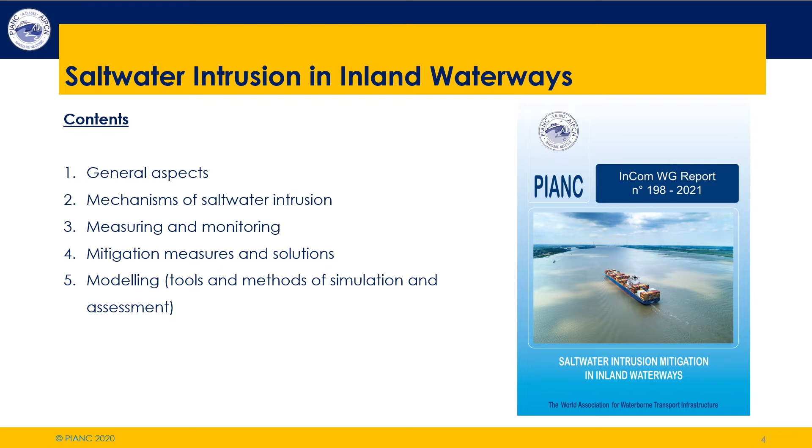A little bit about what this report means in terms of updating the existing literature. There was a PIANC report from the 90s, 40 pages long, a very brief summary of the sorts of issues which have come across. Since the 1990s, there have been a lot of projects, like the expansion of the Panama Canal, the deepening of the Elbe and the new Rotterdam Waterway, and the building of new, larger locks, which have given engineers in the world a lot of new insights into how to study this phenomenon and also how to mitigate it.

So it was a good time for an update, and our update is here on the right - our PIANC report, which is 140 pages long. We thought that was not long enough, but we needed to be as concise as possible. We think it's a good update on what was available before.

Now I'm going to hand over to my colleague Frank to tell you a bit more about the mechanisms of salt intrusion, why it's important, and what affects it. Over to you, Frank. Thank you, Tom. My name is Frank Kösters, and I will carry on from here.

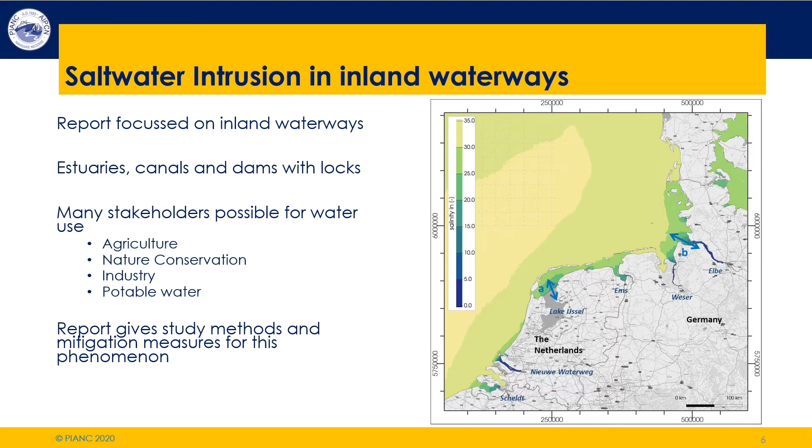For tides for estuaries, or the salt intrusion in estuaries, the salt intrusion itself is depending on the freshwater discharge, which pushes the salt out of the estuary, and the influence of tides. The relative strength of the freshwater discharge and the tides define the different ways salt water intrudes into the estuary.

And then there is a situation in between where we have intermediate tidal energy, and you get partially mixed conditions where you have stratification during only some part of the tides.

However, all of this might change if you take into account effects such as changing sea level due to climate change, or the impact of human interventions, as an example.

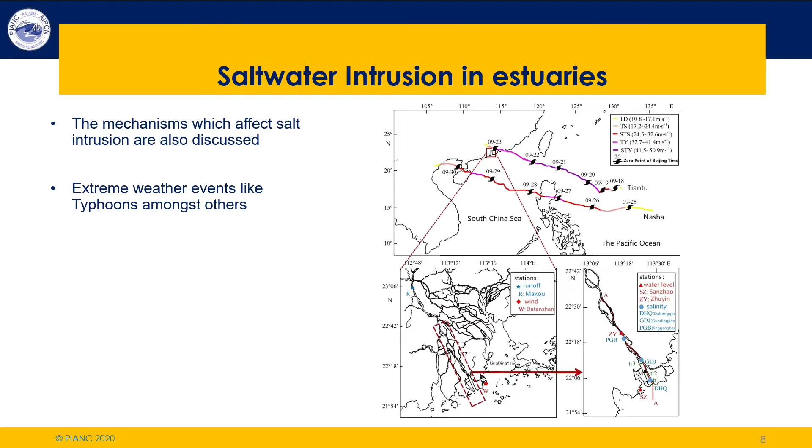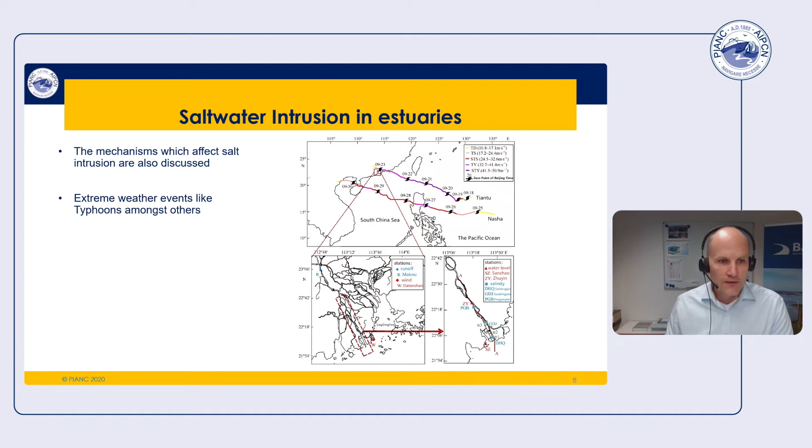As you can see, that's a very complicated mechanism which plays a role, and we go into that within the report. Typhoons are just some examples of extreme weather events which may play a role.

On the other hand, we get salt intrusion through locks, and there are three main mechanisms involved in that.

Firstly, there's the effect due to the boat itself. You get a volumetric displacement, which happens when the boat is leaving the chamber to the sea. It results in a flow from the sea into the lock chamber, and when it enters the adjacent canal, the salt water goes out into the river, carrying salt during that process.

A second mechanism playing a role here is the so-called lock exchange, which is a density-driven current. When salt water flows from the sea underneath the freshwater due to the difference in density, it is mixed into the lock chamber and then goes into the canal as well, with a bigger difference in salinity producing a bigger difference in density and a faster density current.

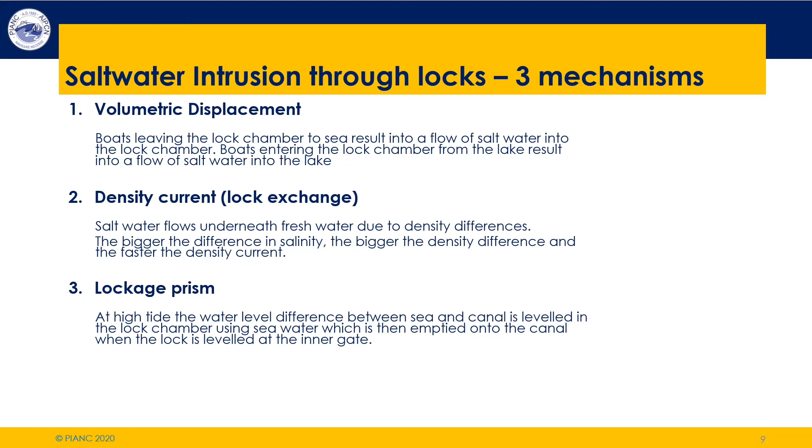And finally, you get something like a lockage prism, where you have different water levels, for example at high tide. The water level difference between sea and canal is leveled, and the lock chamber uses sea water, which is then emptied onto the canal when the lock is leveled at the inner gate.

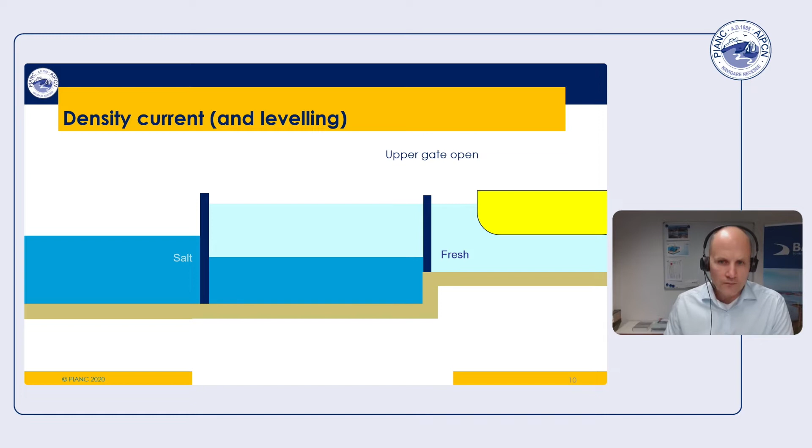In order to visualize these processes a little better, you can see here an animation of a boat coming in from the canal, being in freshwater, and then when the upper gate is open and the boat enters the lock, you see on the bottom the saltwater intrusion due to the density current in the canal.

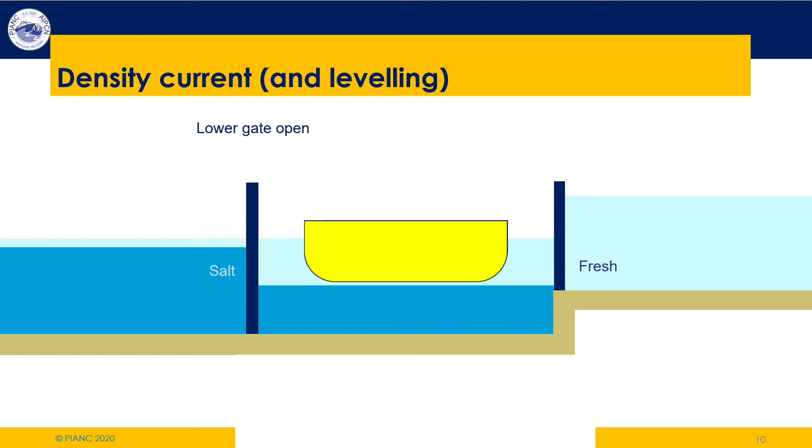And then once the boat is leveled down to leave for the sea, you see the salt coming in from the sea into the lock chamber when the lower gate is opened, and the density current with the salt intrusion entering the lock chamber.

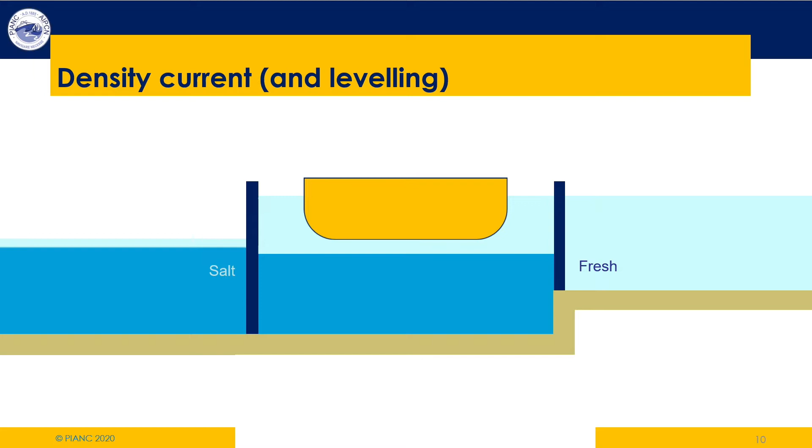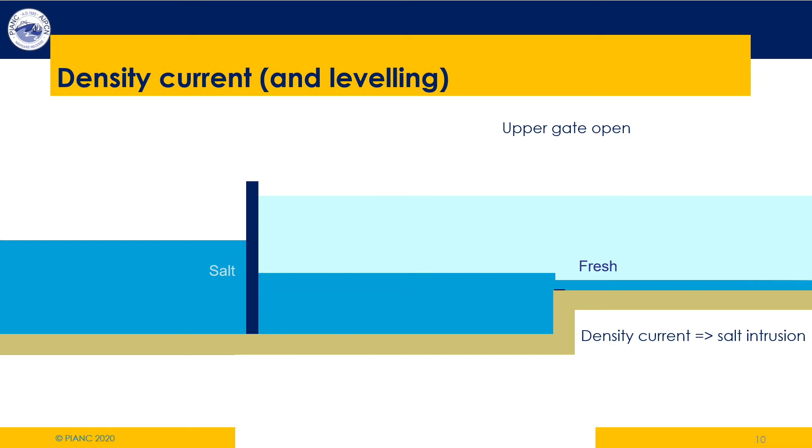And it works the same vice versa. When the boat is coming up from the sea and is leveled up to leave into the canal, you can see the salt intrusion again when the upper gate is opened, and together with the boat, the salt water is leaving into the canal. Well, that is a very brief overview about the mechanisms we can show here.

To dive deeper into it, you have to look into the report. And from here, I'd like to hand over to Tom again.

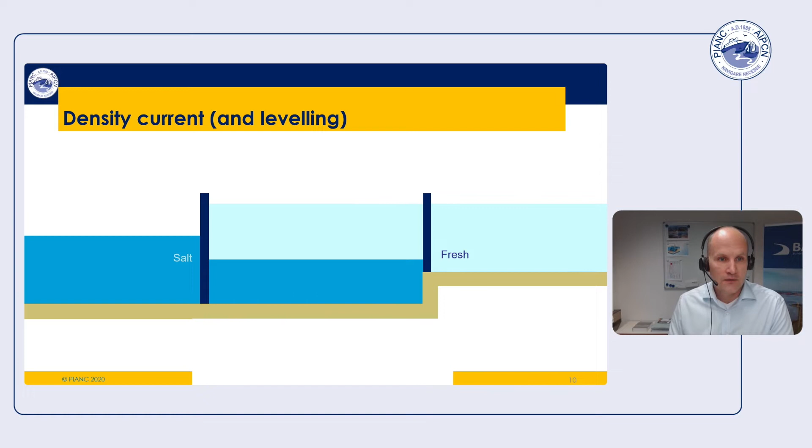So that was our introduction. Salt intrusion in inland waterways is a topic which is often needed to be taken into account in navigation projects, the deepening of a waterway or the building of a new lock, for instance. And these are the things that can have an effect on it.

For the next presentation, we're talking about how do you measure salt intrusion and what sort of measuring campaigns you would need to do to study it for your navigation project. And to present that, Gary Brown from the US will take over. Off you go, Gary.

Thank you, Tom. I'm going to be speaking about measuring and monitoring of salinity and some of the questions you may want to ask yourself when you're trying to develop a means to measure and monitor salinity.

The chapter is laid out basically as a guide to develop the set of questions you would want to ask yourself when you're trying to understand and design a salinity measurement campaign. The reasons for that is because there are a lot of different uses for salinity measurement, everything from modeling to just monitoring or informing decisions.

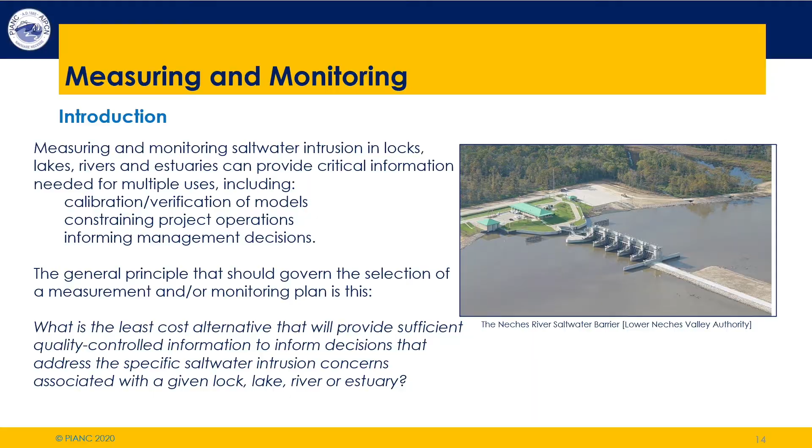But as a general rule, salinity measurement can be an expensive proposition because of mobilization costs and equipment costs. So you want to target the salinity measurement to optimize it for the problem you're looking at. This chapter is written really as a way to bound the problem, to ask yourself all the questions you need to ask in order to properly design a salinity measurement campaign. That's the thinking behind it.

We have a question, it's kind of wordy, but phrased at the bottom of this: what's the least cost alternative that will provide sufficient quality controlled information to inform decisions that address the specific saltwater intrusion concerns associated with a given lock, lake, river, or estuary? It's just a long way of saying the same thing.

How do we optimize what are almost always limited resources to get the data that we need for the problem that we're looking at?

So there are several questions that we first ask ourselves. The first one is, of course, what specifically is the problem that we're interested in? There are lots of different problems. Is it something related to what's the mechanism of the saltwater intrusion?

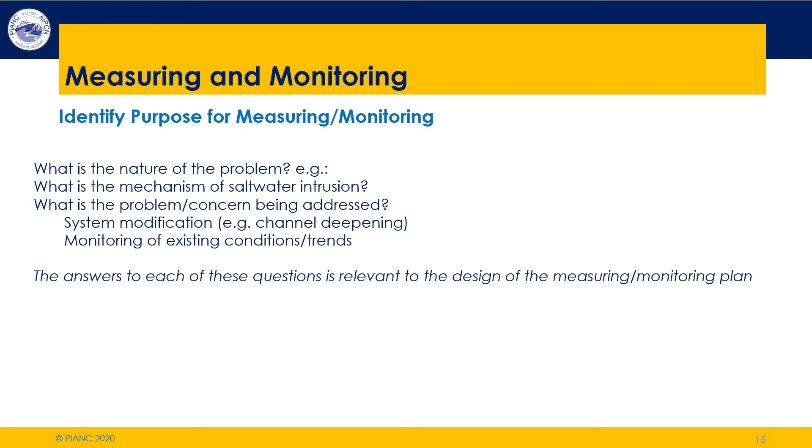Are there one or multiple sources of salinity in the area? Is the problem we're interested in a short-term problem or a chronic problem, or is it acute versus chronic? Is it something more gradual? Is there spatial coverage, or is it a local problem?

All of those, and even referencing the actual mechanism of intrusion, are important, because all of those things will help guide your decision making about what type of data you need in order to understand the problem you're addressing.

Once you establish that, it's important to develop a detailed plan before you execute it, on exactly how you're going to collect the data. You certainly want a robust and realistic budget estimate for yourself.

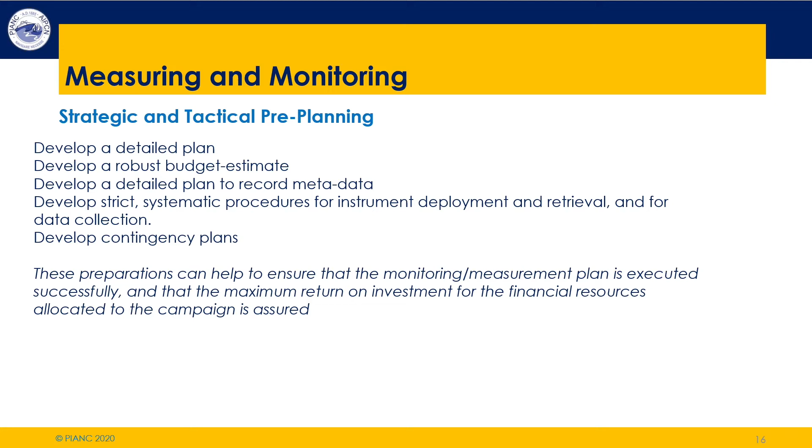You want to make sure you have a plan to collect metadata, so that you record everything about where and when you collect the data. In this sense, it's very similar to data collection in a laboratory, making sure that you've documented everything you have.

Not only for your own project, but also with a recognition that you'd like to be able to archive this data and possibly use it later, since you're investing in it. You want to have all the data available so someone can pull it out and use it, or so it can be published on the web for more general use.

You want to develop systematic, strict, and consistent procedures for data collection, to make sure that if you are deploying multiple instruments, or multiple individuals deploying them, they're all deploying and recording in a fashion that is consistent across the data collection methods, and that the methods are consistent with the design constraints of the equipment you're using.

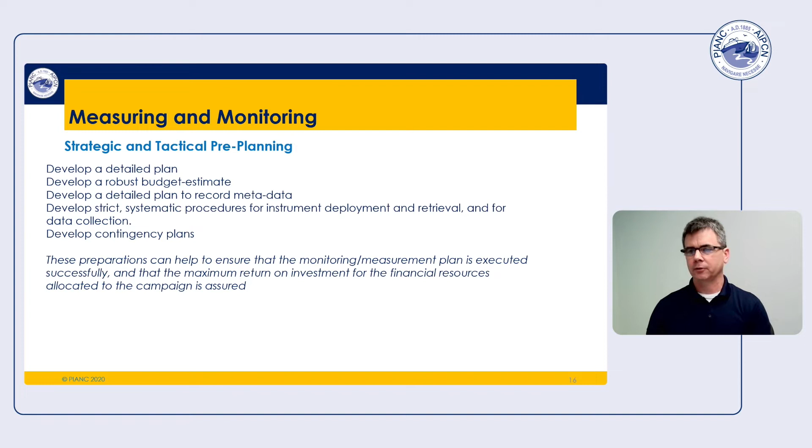You also want to develop contingency plans, because something always goes wrong in data collection. You lose some equipment, equipment is damaged. How do you mitigate for that, so that if you lose a few data collection points, you don't end up without enough data to sufficiently inform your project? All of those things should go into the data collection plan.

We talk about means of measuring salinity. Of course, there are several means to measure salinity. Two of the most common are basically bottle samplers, which get discrete samples of water that are then sampled for salinity, and also in situ conductivity, temperature, and depth sensors that measure those parameters in the water in real time. You can deploy and retrieve them to get much more frequent and continuous observations, and we talk about the advantages and disadvantages of these.

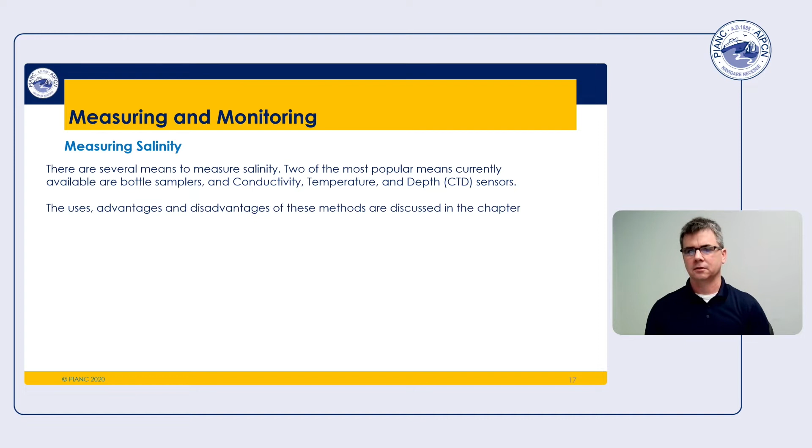There are cost advantages, and maintenance advantages and disadvantages, and which method you select will depend heavily on the type of data necessary for the problem you want to address. As an example, you can get broader and longer term coverage with bottle samplers, but the frequency in time is much less. So if you need higher frequency measurements, you may need to deploy CTDs in order to get those. Those are the types of things you want to address.

And then also you want to look if you're going to have a measurement campaign. Two of the primary types of campaigns that you can deploy are either synoptic station measuring campaigns, where you have stations where you're collecting data continuously, or intensive boat-based campaigns where you're collecting possibly ADCP together with salinity to get sediment fluxes across inlets, or things like that,

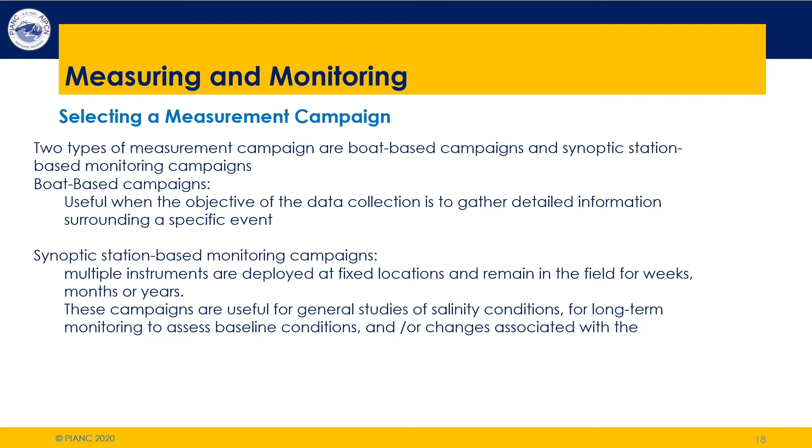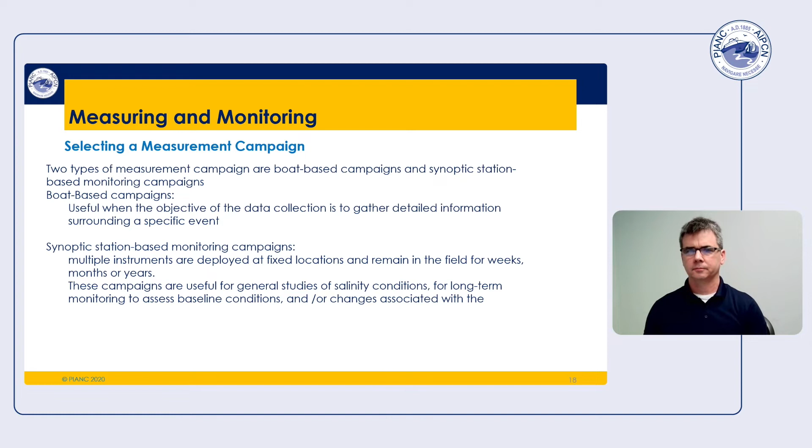where you have much more intensive data collection. And which methods you use, again, are going to be dependent on the project that you're engaged in. The first questions that we ask at the beginning help inform these types of questions. So again, these chapters are a way, hopefully, to help you organize your data collection campaign and get the most out of your funds. And we hope that it's helpful for you in terms of understanding and collecting data for salinity intrusion.

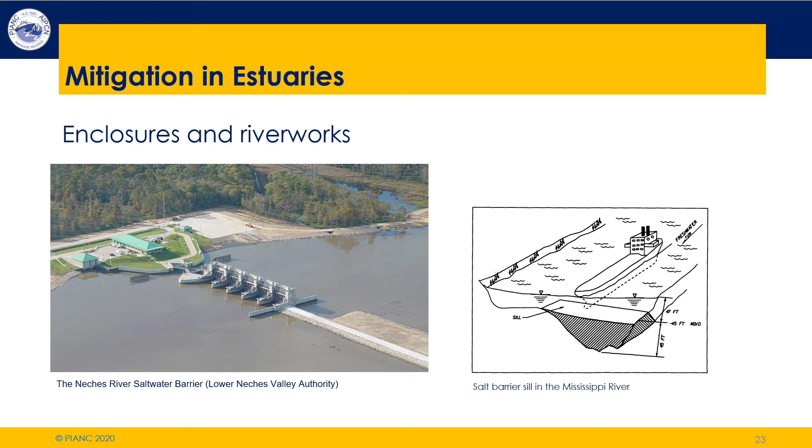But at other times of the year when there's enough river discharge, you can open the gates, or maybe even there's flow over the entire width of the river in those situations. But for the drought periods where it looks like the salt water is coming too far upstream, you can have a structure like this, which closes the gates.

Similarly, on the right, we have an example which will be talked about later by one of the external speakers, Bill McAnally: the salt barrier in the Mississippi. This is a temporary mitigation measure. It's a temporary salt barrier built only in periods of drought, and down in the Mississippi River they have decades of experience in putting this in when it's necessary. There's more information on that in the report.

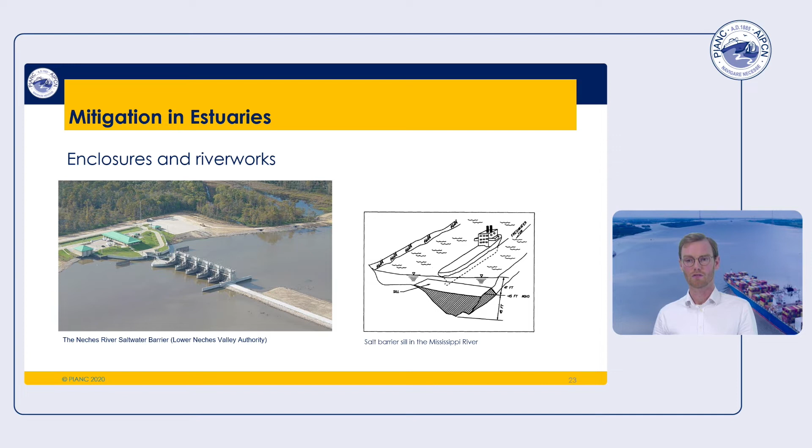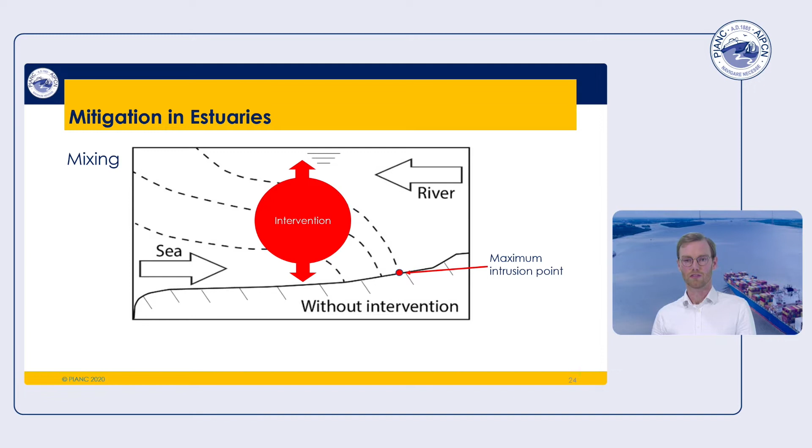Here, this is the situation, and this red point here is your point of maximum intrusion, depending on how you define it. So then, what you'd want to do with this mixing mitigation measure is add some sort of intervention in here to induce mixing in the water column. Now we talk about a couple of intervention types: creating lateral flow, bubble screens or bubble plumes, pumping boats, or strategic dredging. These are described in the report.

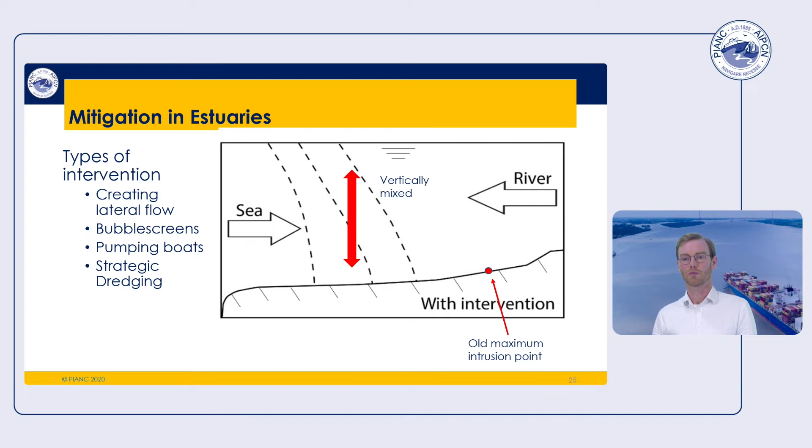The effect that it has on your density profile is shown on the right. You have a much more vertically mixed system, so the lines of constant density are much more vertical, and this has the effect of moving your point of maximum intrusion from the point upstream where it was to be a little bit farther towards the sea. So in this instance, you've reduced the salt intrusion.

Of course, the reason why you want to reduce salt intrusion is because you use the water for something, and where you use it, you extract it from the surface water. This measure may actually be counterproductive because you've increased the salt concentration near the surface in some places. So you always have to be careful about making interferences in your estuary.

And I remember when I was young, my grandfather always used to tell me that I needed to close the door to keep the cold out because he wanted to keep the room warm, and it was only polite to close the door behind you. So that's the same sort of principle here. You've got to close the door behind you to keep the salt out.

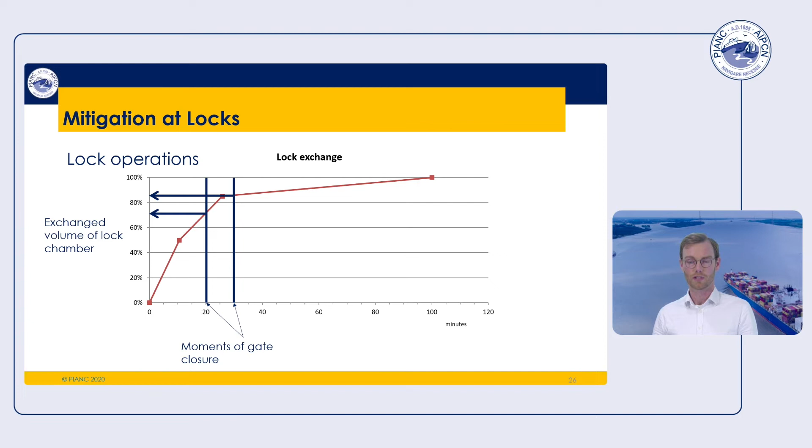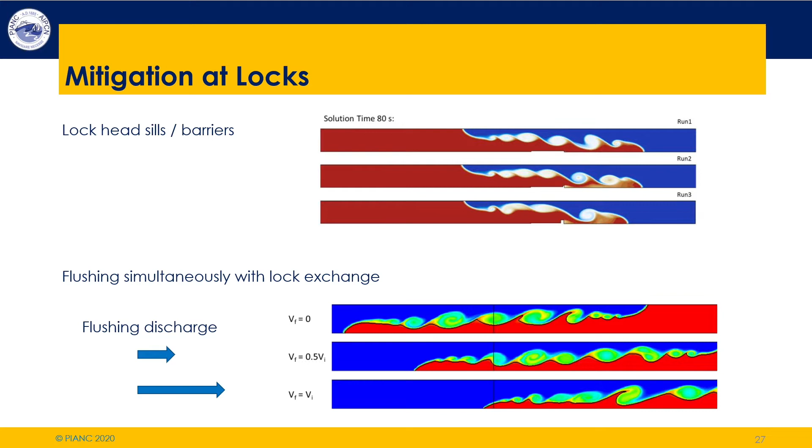So the sill has the effect of not only reducing the height over which exchange happens, but also reducing the speed, because the speed of lock exchange is proportional to the square root of the height. So the smaller the height of the exchange column, the slower the exchange. And underneath, we have examples where you can simultaneously flush the lock chamber with fresh water to stop the salt water from advancing. The lower picture has got 3 different velocities of flushing. So you can see that here the salt water is prevented from moving beyond the lock.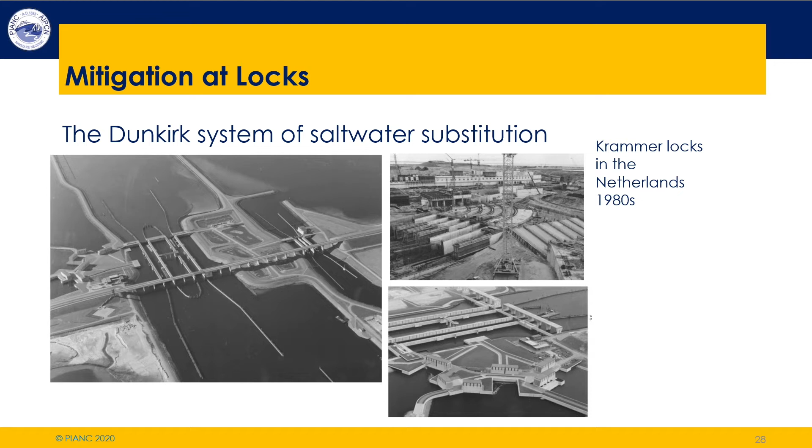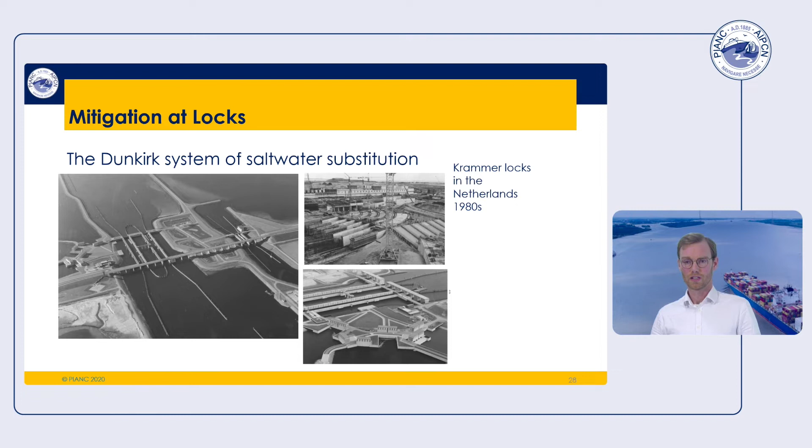And that's got a very, very large cost in building it, and it takes up a lot of room as well, because you have these receiving basins which store fresh and salt water during the process. The process is described in detail in the report. This one is the most effective at reducing salt intrusion to almost nothing, but it costs a lot of money to build, and it also costs a lot of time for ships to pass it, because they have to wait quite a long time in the lock while the salt water is extracted. So these are the sorts of examples we have in the report.

Many more examples as well, and at the end we also have a table to summarize which ones we think are the best ones and in which situations they're the most useful.

Okay, so that's mitigation, and now the final presentation for today and the last chapter is modeling, physical modeling and numerical modeling, and for that I'd like to pass over to Tom van der Wekke. Off you go, Tom. Thank you.

Well, I'd like to present a few slides about modeling. As we have seen in the mitigation contribution, but also in the measuring and monitoring contribution, it is necessary to develop those mitigation measures, and therefore we need some tools to compute whether those mitigation measures will help, yes or no, and how far they will help.

So therefore, modeling is very often used to get a qualitative but also a quantitative impression of the rate in which measurements can be carried out, in what kind of shape the mitigation measures are needed. So that's important, but even more important is that salt intrusion in inland waterways can hamper many freshwater related interests, and governments ask more and more for detailed studies to assess the impact of changes in salt intrusion.

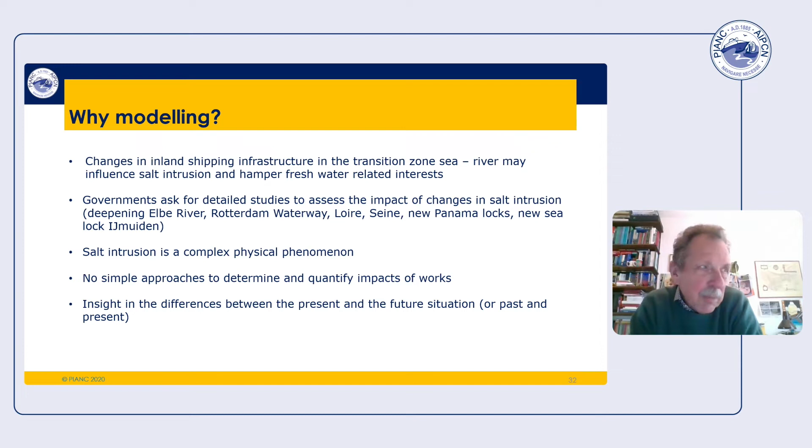Of course, the knowledge of specialists is also important, but they also need models to get more quantitative information. In the pre-computer era, we only had two tools, the physical models, the so-called scale models, or on the other hand, greatly simplified mathematical models. Nowadays, we are happy that besides physical models, we also have a number of numerical models.

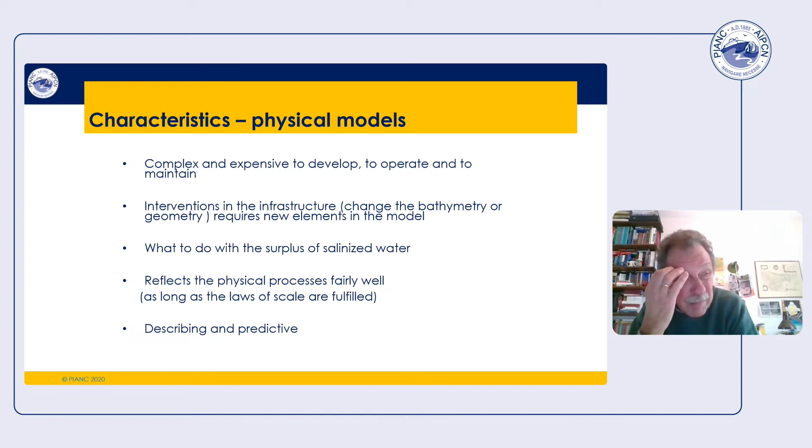So I'd like to tell a bit more in detail about the physical models, the advantages and the disadvantages. Physical models are very complex and expensive to develop, to operate and to maintain. Interventions in the infrastructure, for instance a change of the bathymetry or geometry, require new elements in a model. An important problem also is what to do with the surplus of salinized water.

In a scale model, we have real water. The seaside is salt water, the riverside is fresh water, they meet each other, and what we have in the end is a surplus of salinized water. But where to go with the salinized water? That can be a big problem. On the other hand, physical models reflect very well the processes we like to investigate.

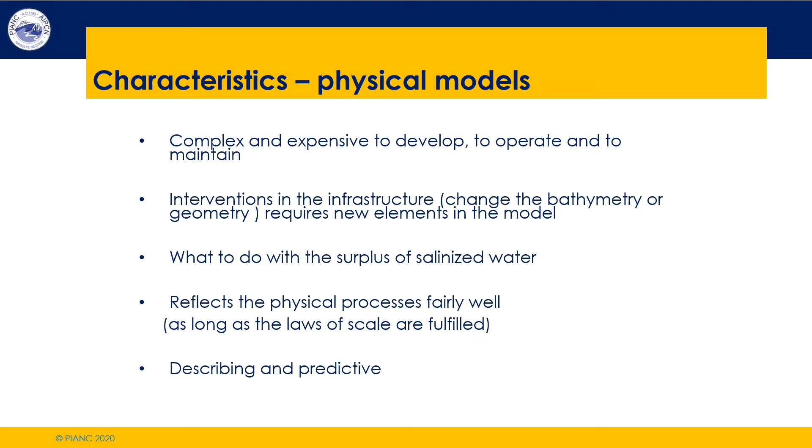Under one condition: we have the so-called laws of scale, and they have to be fulfilled. An important one is that in a scale model, where everything is much smaller than in reality, the turbulent processes that are very important for salt mixing and salt intrusion also have to be reflected in a sufficient way. Scale laws are very important to be fulfilled in scale models. An advantage is also that physical models are not only describing but also predicting.

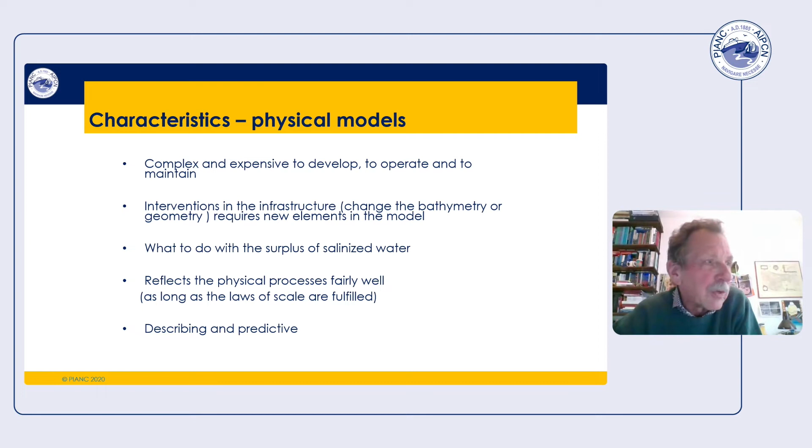Two examples of physical models. At the left side of this slide, you see the so-called model Rijnmond in the Netherlands in the 80s and 90s of last century. It was a very big scale model of the so-called lower river area, with the North Sea at the left side and the upper river side at the right side. The model was more than 100 meters from left to right.

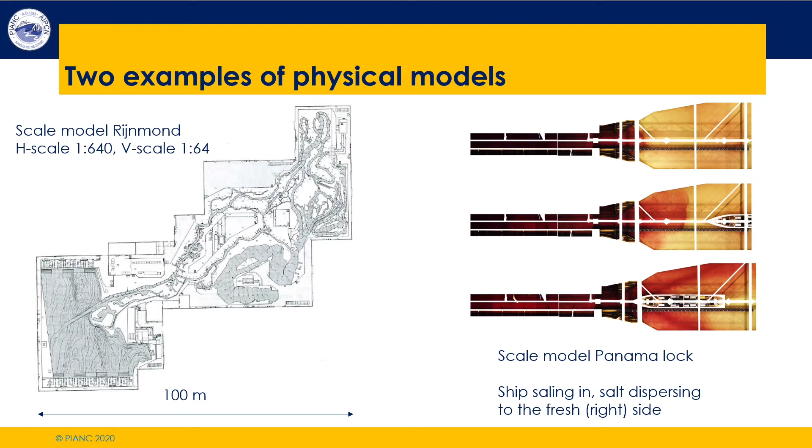On the other hand, we see a more recent model of the Panama lock. Maybe a bit difficult to understand, but the upper picture gives a situation when the doors are just opening. At the right side, we see the freshwater area. At the left side, we see the lock with salinized water. And when the doors open, you see the salt water coming from the lock into the fresh water to the right, and in the lower picture you see the bottom layer with salt water moving to the right.

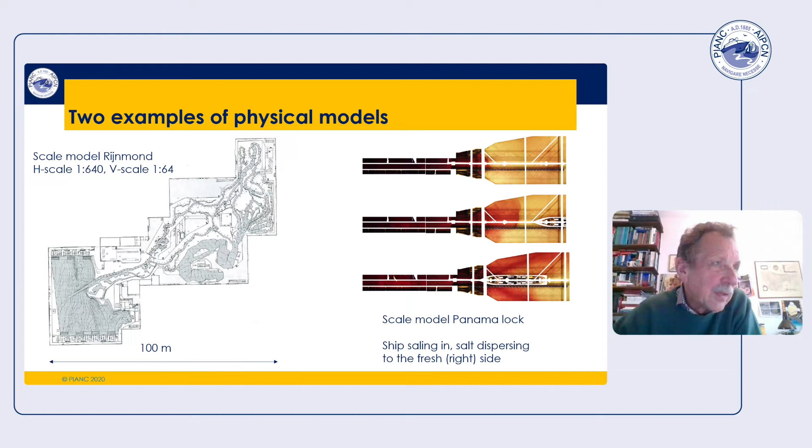The simplified mathematical models have as properties that they are very easy to use and cheap, but on the other hand they are mainly describing and hardly predictive. They are time averaged, and they don't give a quantitative insight, only a quick qualitative insight.

And then some characteristics of numerical models. Numerical models are complex and expensive to develop. On the other hand, they are cheap to operate and to maintain. They're also cheap to change the bathymetry or the geometry.

Long-term evolutions can be costly because they need a lot of computing time. Therefore, we have different kinds of models: one-dimensional, two-dimensional vertical, two-dimensional horizontal, three-dimensional. They are all available presently.

We've seen many times that people like to choose the most complex one, three-dimensional, but we have to be aware that it is not always necessary, and especially when you want to make long-term evolutions, 1D or 2D models can be much cheaper than the 3D ones.

But as computer capacity in terms of memory and velocity is becoming a minor issue, the application of three-dimensional models is more and more common. However, it's not always necessary, and sometimes physical models are even preferred in cases where even a numerical model is not able to reflect the processes that we want to investigate sufficiently.

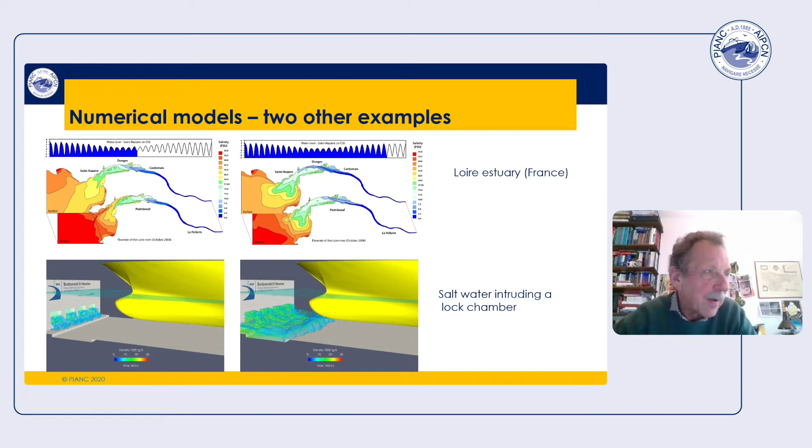So with that, I'm coming to my last slide, and I have to give a warning: be aware that each model is simplifying reality.

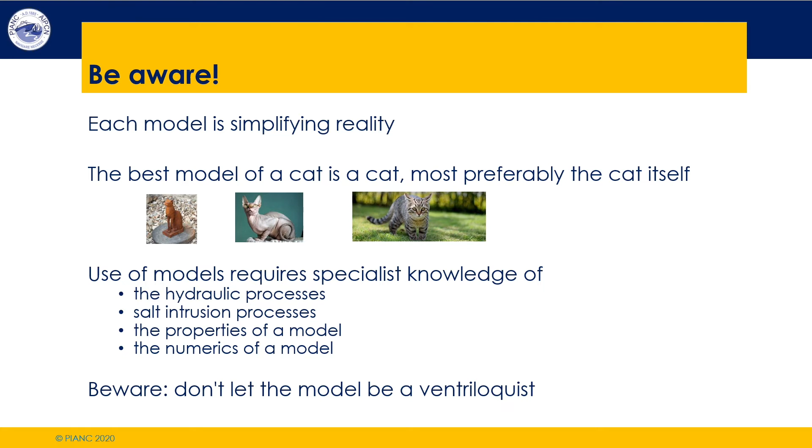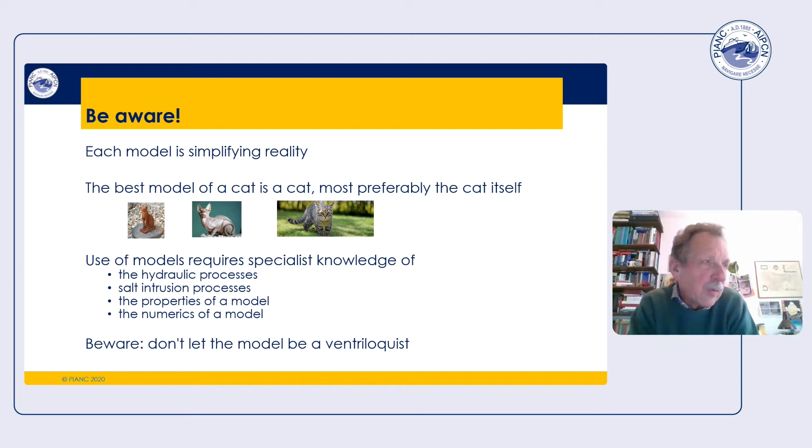Sometimes, in an ironic way, modelers say that the best model of a cat is a cat, and most preferably the cat itself. What we want to say is this: use of models requires specialist knowledge of, among others, the hydraulic processes, the salt intrusion processes, the properties of a model, and the numerics of a model. So when you are not a specialist yourself, always call for specialist knowledge when using models, because if you don't, we let the model be a ventriloquist, and that is not what we want to do.

Okay, thank you for your attention.

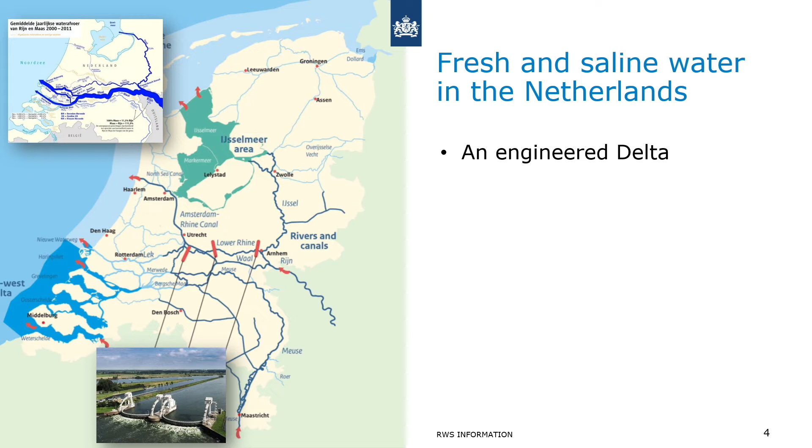We built weirs to divert at low water the river water and steer it to particular areas. Of these particular areas, only a few of them are still open in direct connection to the sea, originally like estuaries, but many others are more enclosed.

It's like Lake IJssel, the central part, the upstream part of the Rhine in the western part of our country, and in the southwestern part of the country. These have originally been estuaries or in contact with estuaries, but have been dammed mostly because of water safety reasons and policies, shortening your coastline. It's all making it cheaper and safer. But it has a drawback in that you have strict and hard interfaces between fresher and salter water.

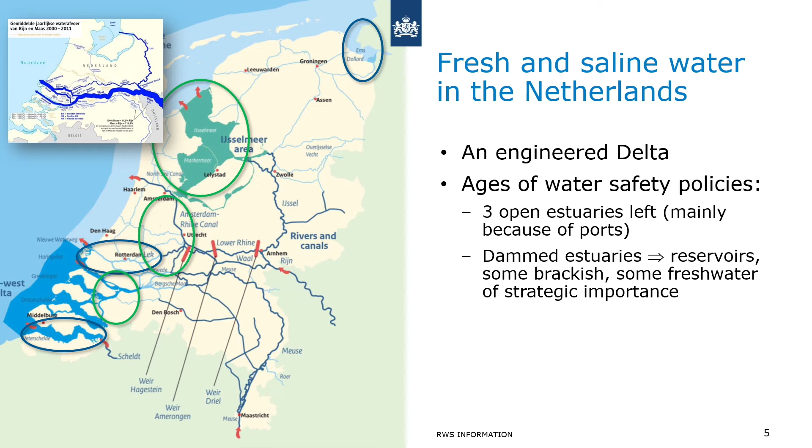And ironically, some of these freshwater areas have become strategic to us right now. So not only as an accident, but more and more we have to rely on these areas for fresh water.

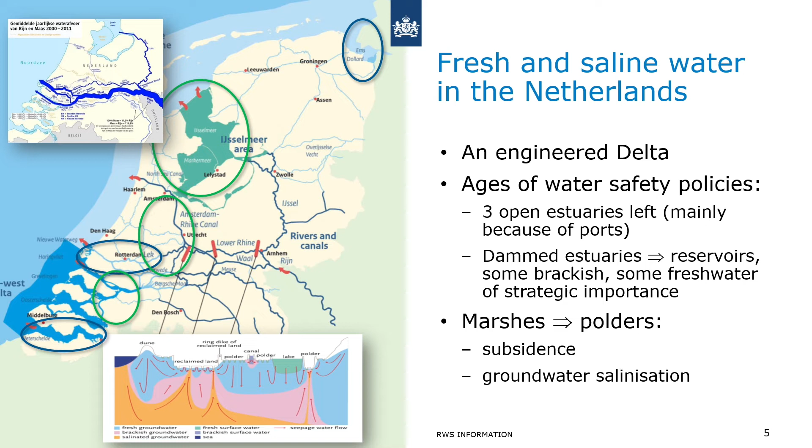I'll go into that in my next slides. At the bottom of everything, this delta is a sandy, clayey, peaty area where there's a lot of internal salinization of groundwater seeping into our reservoirs. It is also something to be managed and gotten rid of if we have the water to do so.

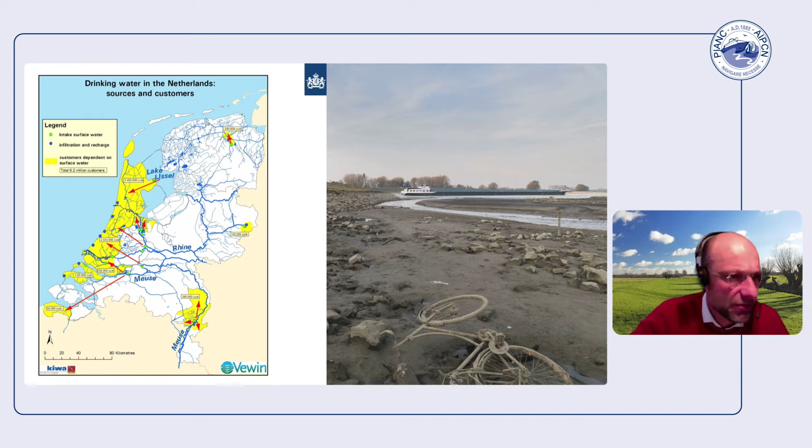So how do we manage, and what functions depend on the fresh water we have? About half of the drinking water in the Netherlands is produced from fresh surface water, which is mostly in the west, and hence influenced by salt intrusion.

And also when river discharges get low, and they tend to get lower due to climate change in the Rhine catchment, for example, summer conditions lead to water shortages or scarcity, like the picture you see on the right, really low discharges.

We really have to be careful how we divert our water, because the Netherlands doesn't have an area where we can make a huge storage. Even the groundwater storage we have is not sufficient to overcome a long period of drought. You really see your groundwater reservoirs decrease, and they require a lot of time to recover.

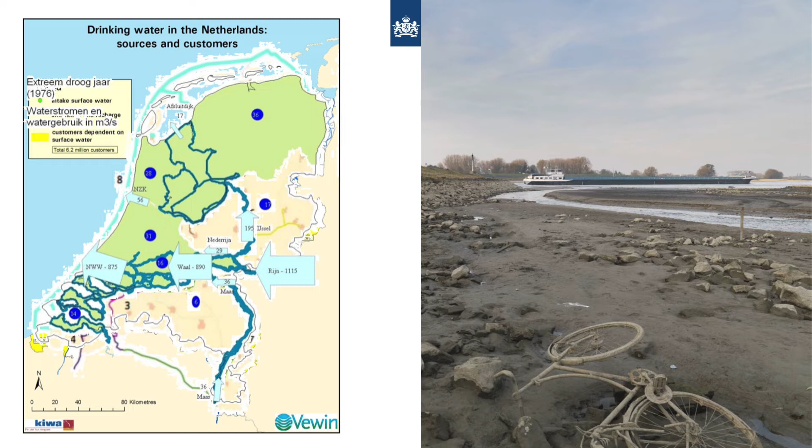So we need measures to be careful and wise with the water. Currently, when it really becomes tough, we have a priority sequencing, also referred to in the report. This priority sequencing means some functions will get longer access to water than other functions. But of course, you want to avoid this sort of situation.

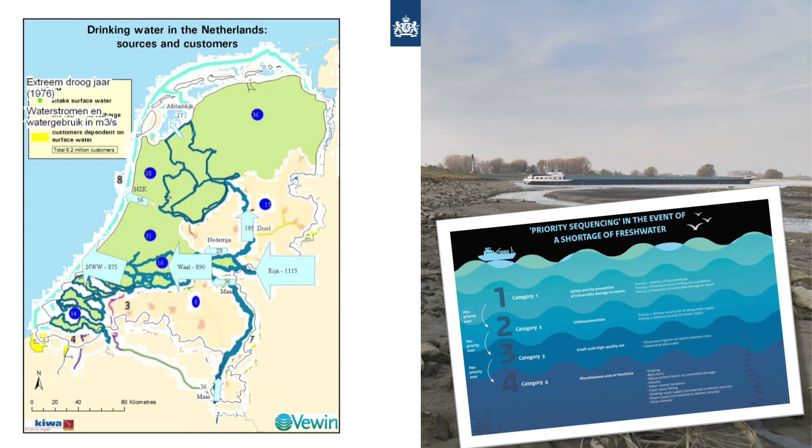So the whole challenge for the Netherlands is to become very smart and prudent with how we manage our waters. Salt intrusion is one of the big issues limiting the quality and quantity of our water. Because how do we manage salt?

We flush it mostly through the basins. We apply withdrawal measures where applicable on dams and locks. And in some places we have barriers like bubble screens and sills to mitigate intrusion locally.

But still, it all requires at least some amount of fresh water to function. All these mitigation measures also require fresh water, which is scarce. So we really should optimize this sort of water usage to maintain the salt-freshwater balance.

This is published online in a real live database. We extract it from our network every 10 minutes, and it's updated online. This is available not only for the general audience, but the same information is available for our operators, who have to take decisions on an hourly basis or even shorter to manage locks or weirs, for example.

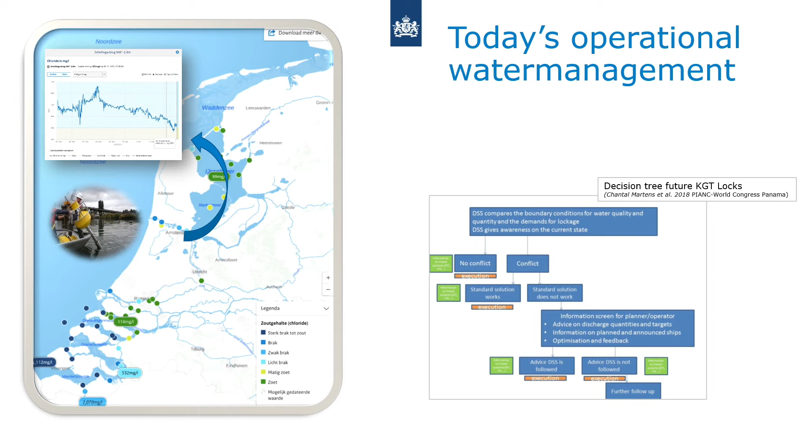And for all our strategic areas within the Netherlands for water management, we have interpreted data, already put into information. It's put into context through a dashboard system that we have for all our zones, which contains chlorosity data, but also other information about water management. So this is how we do things today.

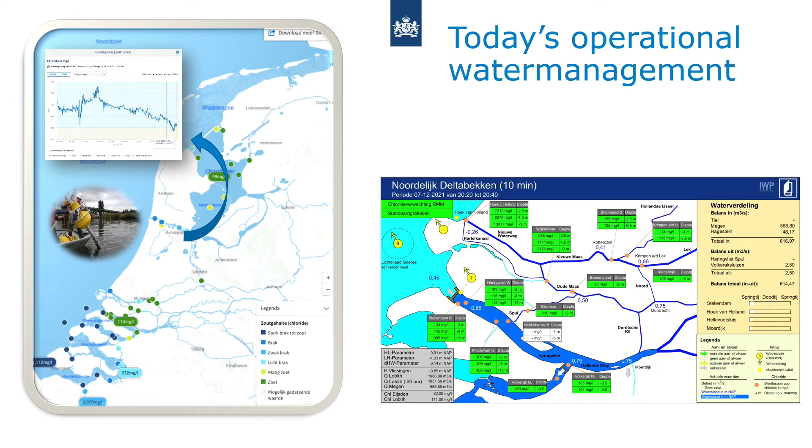It's already quite sophisticated, if I may say, but we are even more ambitious because it can be done smarter. And not only to be smart, but also to become more resilient for future changes. This is really called SMART, or SLIM in Dutch water management.

It's a matter of cooperation beyond the limits of, say, a main water body. It involves upstream water boards, local government agencies that also manage part of the system, which is interconnected in reality. By exploiting the interconnections and the way the whole system works, you can make more cost-effective measures for managing groundwater.

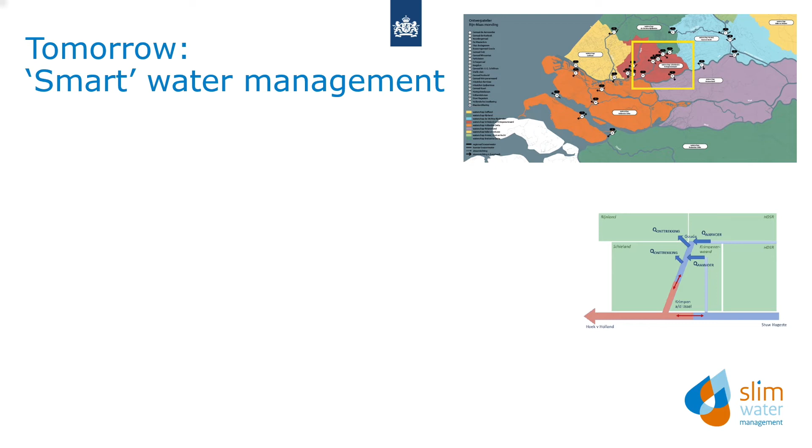For example, in the Rhine Delta area, it is at certain times beneficial to divert a bit of the fresh water upstream, where it's fresher, through bypasses and the local network upstream into what's called the Hollandse IJssel branch. Having this solution in place requires not only a lot of tuning within the local authorities, but also a good piece of information.

We're building, still in the development stage, information screens that have a lot of interpreted information from different networks combined. It relies on forecasting or predictions of the trends in the system, and it can be used along with a line of reasoning about what measure to take, when, and with whom. This is putting an important basis for future water management.

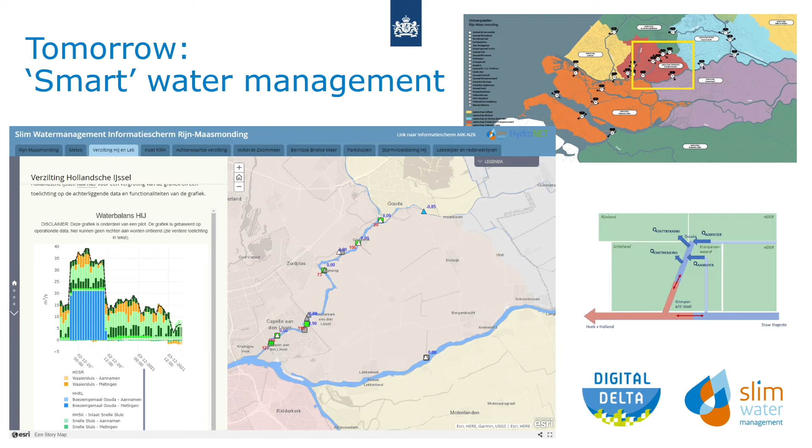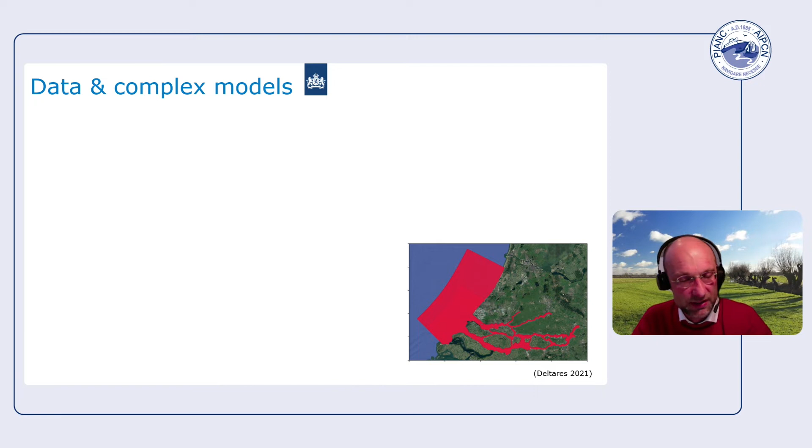How do you design such measures? It's not easy, actually - it's a quite ambitious task. As the previous speaker said, data, observational data, and models are key to this. We invest a lot in complex 3D models, but also, as Tom said, simpler models to corroborate and underpin how we design the management of these complex systems.

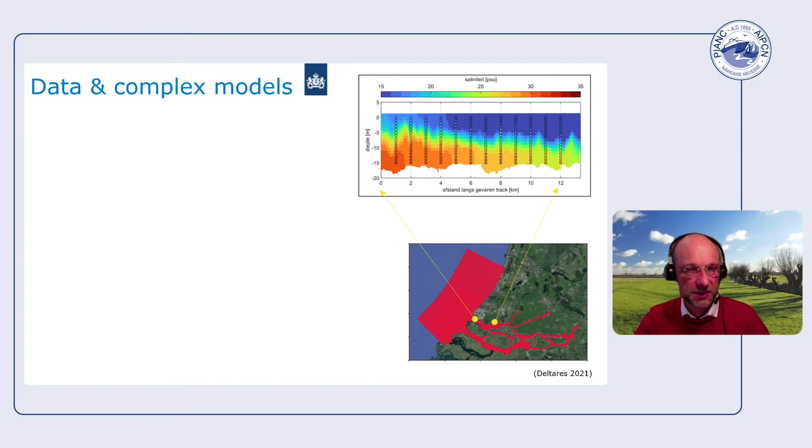Nowadays these models are really capable of exhibiting the proper scales of variation that are relevant for water management. This is an example of a cross-section in the Rotterdam Waterway in a currently, freshly developed 3D new version of this area, where the dots show the observations at a certain moment in time, and the color shades show the model solution for the salt wedge in the estuary.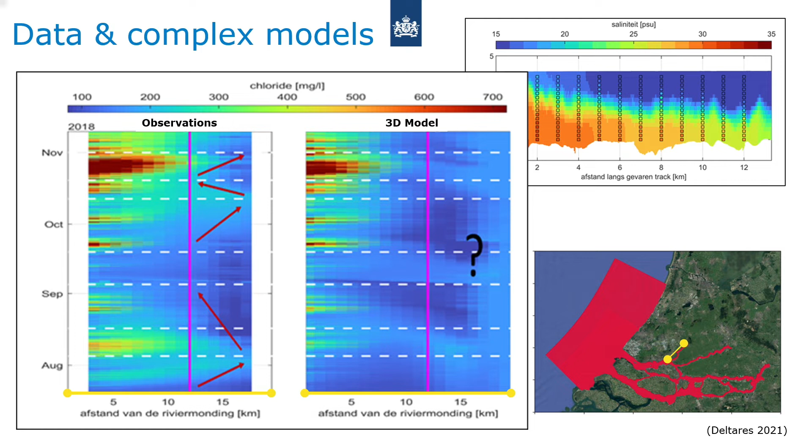On the left here is a Hovmöller diagram, vertical in time, horizontal in space, of the Hollandse IJssel system. On the left you see it observed; on the right you see the same from the 3D model. You see it already reproducing the response of an extra flushing upstream, and how the salt wedge responds to this flushing over a dry summer - the dry summer of 2018.

This is putting a lot of confidence in the way we can even further fine-tune these sorts of measures. And as if it's not enough, I think we've learned from 2018, as Rijkswaterstaat and local water boards, that we can manage water smartly, regionally. This has put a basis on a higher level to repeat this template at a national level.

It's a more resilient way of making optimal use of the scarce water that flows in. When there's no rain for a month or longer, we fully depend on water coming from abroad. We anticipate so we can buffer locally, and we anticipate on weather and forecasts, and we do it smartly - so we adjust and fine-tune the measures that are required.

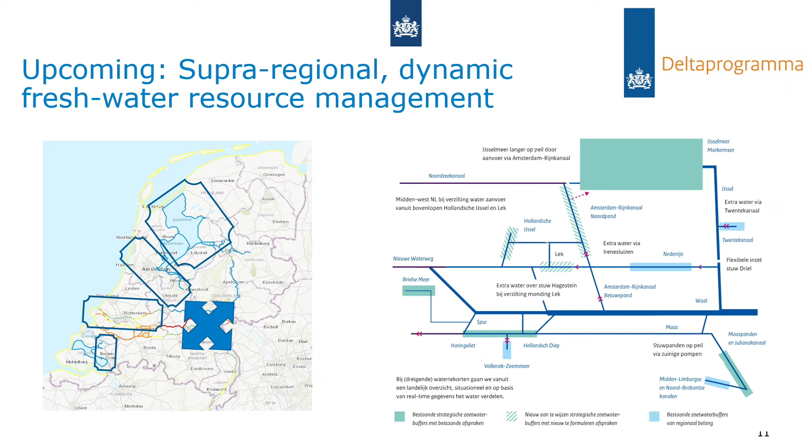Of course, we can only be smart and clever with the water that we do have. So there are also complementary measures on how to use the water, which function to place where, etc. There's a whole program, within the national strategy - the Delta Program - to keep this in balance for the future. Then we're confident to be prepared for at least the coming decades, to be resilient to climate change, for example, and provide sufficient water for all our functions in the Netherlands.

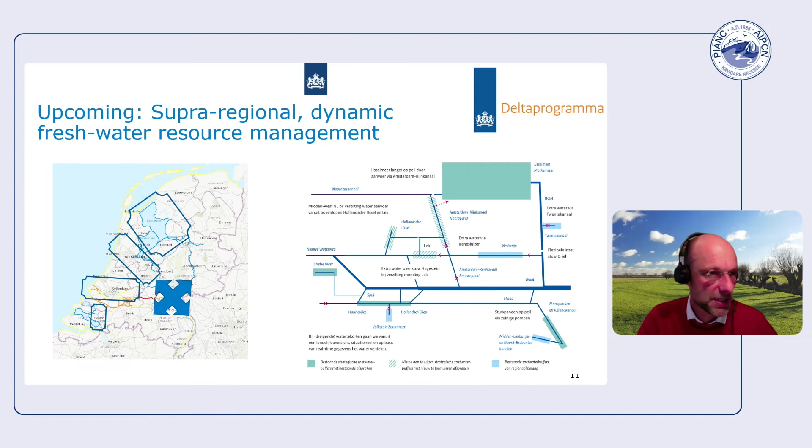Still, extreme sea level rise and extreme climate change may put another stress on this sort of system. So at the same time that we've actually developed this strategy and started to implement it, we're already stress-testing to what degree this can withstand extreme climate change and extreme sea level. That's a separate piece of work, separate programs - we do that sort of work.

So to wrap up: water and salt intrusion management is a balancing act. It's a balance between fresh and salt, but also a balance of different interests. At the object level, where you redesign or implement a structure in your system, you have to commit to certain operational design requirements that can sometimes be conflicting. When you take it to the next level, on regional scales, we have hard and soft objectives that we try to keep in the air as much as possible.

On our national level, the story repeats, where we now see this coupled system of buffers and changing requirements locally, regionally, but also over time to keep up. It's all about how you use the data as a basis of what you know, put it into information, put it into knowledge, and in effect, underpinning decisions and design. So the better your insights, and also something that PIANC is providing, the better your decisions, the lower your risk. In that sense, classical engineering is evolving more and more to a different sort of engineering, more integral, more adaptive, and that's complex.

But I think it requires a lot of knowledge, and I see that we're capable of doing it internationally. So last but not least, the future becomes more demanding. I think adjustable strategies are the key to being flexible for future changes. Thank you.

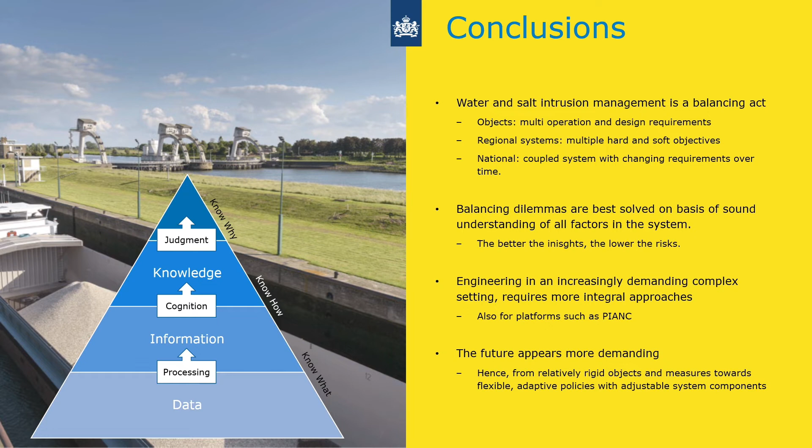Okay, thank you, Mainte, for your presentation and a look to the future, but also the present. You mentioned climate change and the challenges that is giving to water management in the Netherlands. That hasn't been an emphasis of our presentations from the working group earlier, but it is mentioned in the report that this is becoming an increasing driver of the questions that engineers get about salt intrusion in inland waterways. It's not just a navigation project, a new navigation project, which is driving the need for studies into saltwater intrusion, but just a study of the existing system under pressure from climate change. That's something that's definitely covered in the report, and you see from Mainte that there are governments out there and people out there that want to know the answers.

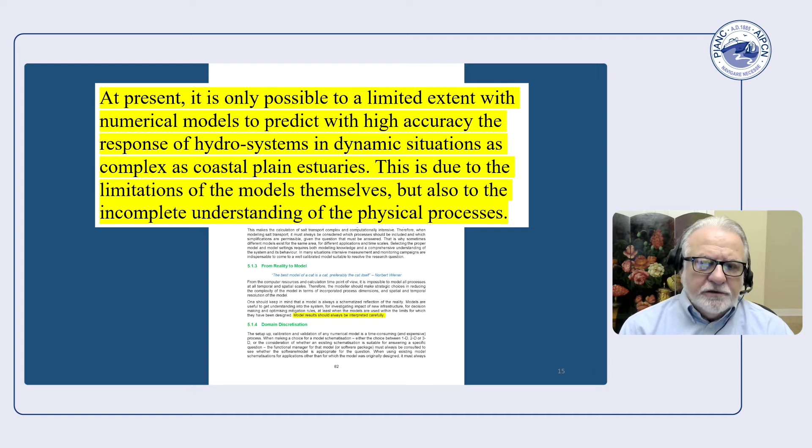The first is on page 82 of the document, and it says this: numerical models right now have an ability to predict with accuracy the response of hydrodynamic systems, hydro systems, but there's a limit to that, and that's due to two things. One is limitations of the models themselves, which are getting better all the time. They're quite good, but it's also due to the fact that we don't understand completely the physical processes that are involved.

And the examples of that, the reasons for that, are that salinity intrusion over small increments and over simple changes can be almost linear, and we get fooled by that. So we can use simple methods and even sometimes mildly inaccurate models to make predictions because it's almost linear, until suddenly it isn't.

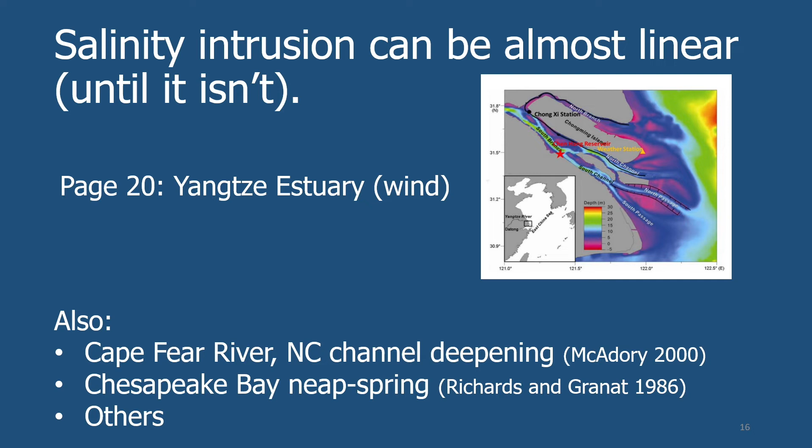And the best example of nonlinearity in the report is on page 20, which shows that clearly the salinity intrusion in the Yangtze estuary is nonlinear with respect to wind. The map, and by the way the graphics in the report are just beautiful, shows that with the multiple channels connecting the estuary, the river to the sea, depending on which direction the wind is blowing from and how strong, there are multiple paths for salinity to intrude, multiple ways that salinity can react. That's what creates the nonlinearity there.

But there are also many others. In the Cape Fear River, for example, McAdory 20 years ago found that deepening the navigation channel caused the channel to become fresher on average, the exact opposite of what we would expect. A very nice case study, and I can get you that reference. If you contact me afterwards, I'll supply you with that reference.

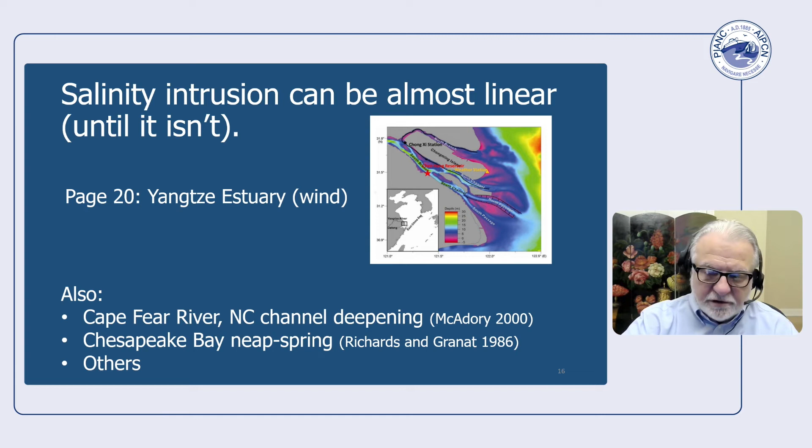That was a numerical model study. Then in a physical model study in the Chesapeake Bay, Richards and Granat showed very clearly that there was a nonlinearity that occurred during the neap to spring cycle, in which mixing characteristics changed suddenly. There was a trigger point where the mixing changed, and the response became very much nonlinear. There are others too. There's been very strong suggestions that San Francisco Bay responds this way, and others we suspect are nonlinear for similar reasons, but haven't perhaps explored them in enough depth to examine exactly why.

The other point on that same page 82 that I want to emphasize is that model results should always be interpreted carefully. And Tom had a very pungent phrase that I enjoyed, and he said, "Don't let the model be a ventriloquist," and that's very true. We have to interpret them. We can't take those results and simply repeat them, let the model speak through us and say, these are the numbers, and this is what the model says.

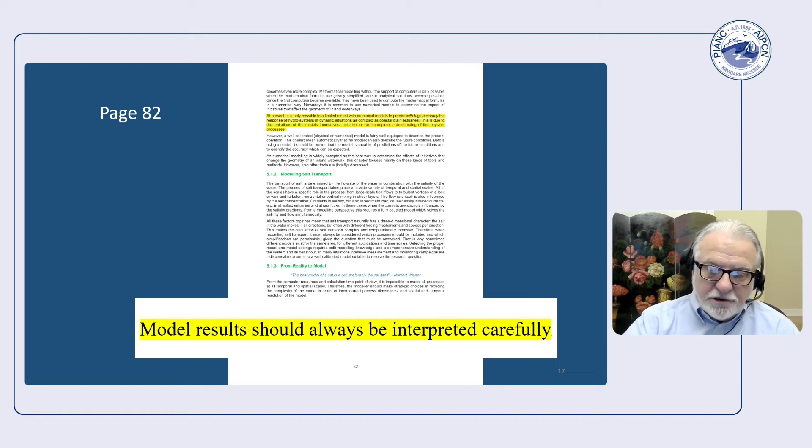If you get someone who's maybe very expert in numerical modeling, and you get those answers out of the numerical model, but they don't have the specialist knowledge that Tom mentioned, they don't know what it means. They don't know if it's reasonable or not, and they can wind up providing answers that in fact are quite contrary to what the real physical situation is.

And so it takes that specialist knowledge to take the model answers and to use that to create insight and to provide judgment about what the answers ought to be. And so that's very, very important in modeling and in any application to salinity intrusion.

Page 123 is one of several pages that lists a number of numerical models that are useful in this. And I'll just add that there are 3 other models in widespread use in the USA that are quite good. One is EFDC, which is supported by the Environmental Protection Agency; ADH, that Gary Brown has had a big hand in, that's used by the Corps of Engineers and supported by them; and then FVCOM, which is a joint product of the University of Massachusetts and Woods Hole Oceanographic Institute. It's a community model that is widely used and modified, as is EFDC.

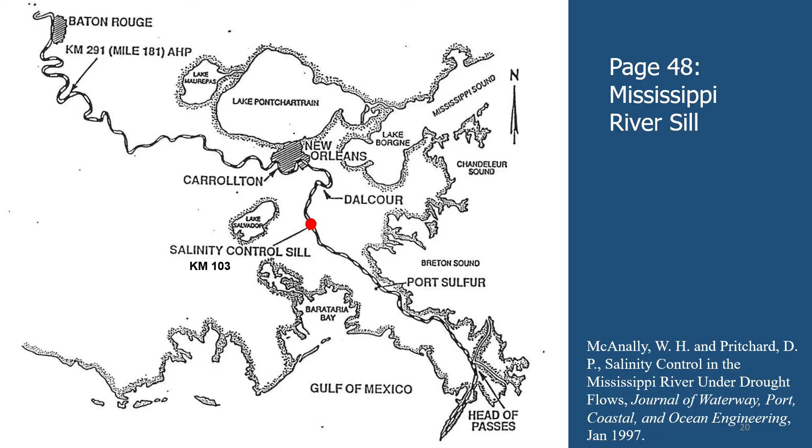And the problem is that it is a salt wedge estuary, highly stratified, and the salt wedge has intruded above New Orleans at times. It's gone a couple of 100 kilometers upstream, and there are a number of freshwater intakes along that stretch of river beginning just below New Orleans that have been endangered or simply put out of commission by that saltwater intrusion.

So when the Corps of Engineers wanted to deepen the channel, one of the schemes they came up with was to build a temporary sill that would be built during times of high flow at 103 kilometers above head of passes, which is shown down there in the bottom. And the intent was to block the saltwater intrusion.

And that was modeled by Billy Johnson and some other folks in our shop at the Waterways Experiment Station, as it was then called, in Vicksburg, Mississippi. And we found indeed that it would succeed in blocking the salinity intrusion. And so in some years it was constructed, 3 times.

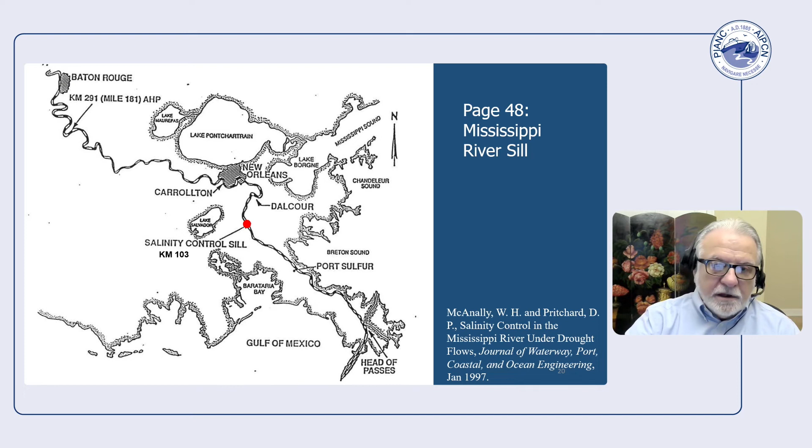After the 1987-88 time period when it was used, Don Pritchard and I followed it during that time, gathered the data, and published the paper that's cited in the report, and did an analysis of the system.

And then during the high water flows, the water will erode that sand sill, which is just sand pumped from the river bottom into a broad mound, and then they will erode it and it will be gone. And sure enough, it has eroded each time it's been built.

However, then in 1988, the first time we tested it, we panicked because we started sampling salt water upstream of the sill, and we thought, oh no, something's gone wrong. But after repeated sampling, we found that what was happening was there were interfacial waves propagating along the interface of the salt wedge between the salt and the fresh water that were apparently generated by storms in the Gulf of Mexico. And these interfacial waves would propagate this 100 kilometers upstream, break over the sill, and then just deposit a small amount of salt water each time the wave broke.

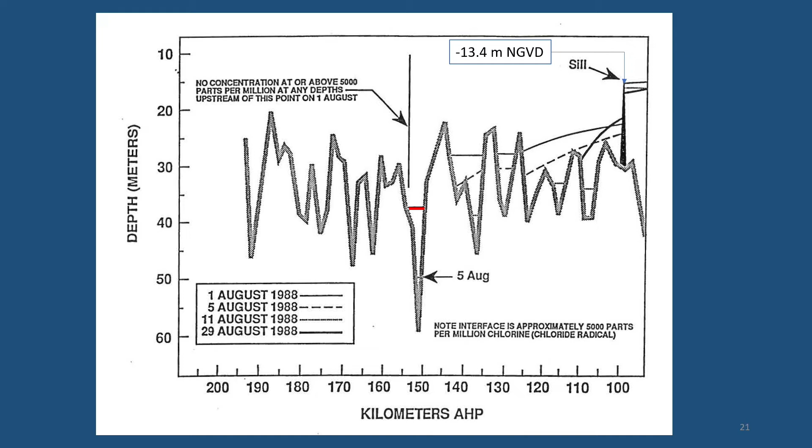And you can see the limit of saltwater intrusion, and I cleverly colored that little bit of red there being the extreme limit of saltwater intrusion in 1988 to show that that's as far as it got, and it remained in the deeps. And then the next freshet of fresh water that came down, it flushed all of that out, as well as removed the sill.

So, all in all, a great success. It's been done 3 times, and I think it's a success story. And as Gary Brown has pointed out, this is sort of an engineering with nature type thing, because it's a minimal structure. It goes away and can be ignored except during low flow periods.